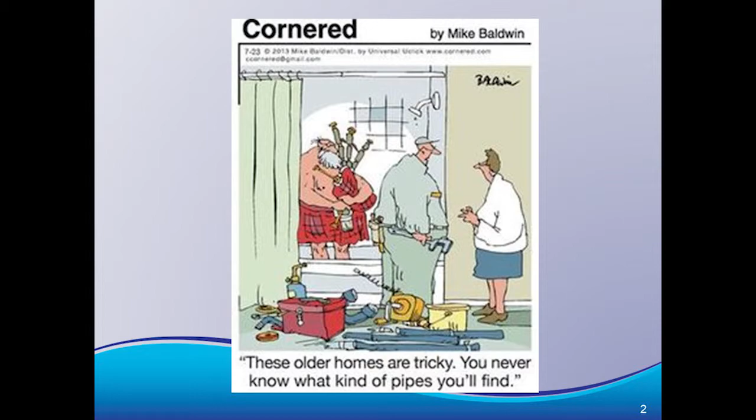And they say to start with a joke. So although this is not really well seen, I thought it was one of the few funny things I could find about plumbing, pipes, and infrastructure. So it says, these older homes are tricky. You never know what kind of pipes you'll find, which I think we all know to be so very true.

So originally this abstract was submitted by John with the City of SeaTac, and he was unable to continue with this, so they asked me to step in. His abstract was a little more technical and mechanical. Mine is going to include some of those elements, but I'm also going to talk about some of the challenges that are faced and things you want to think about before you implement your program. And with the combination of SeaTac and City of Federal Way, I'll try to give credit where credit's due for John's original slides. So first, why inspections and asset management?

I think everyone here knows that our underground systems are a mix of old and new. There are other factors impacting our programs. One of them is personnel turnover. I have people who have been in the program for 20 years and it's all in their head, literally. So we're trying to get this program on paper, actually electronically, into the system so that when he leaves, that little pipe nobody knows about is actually in the system.

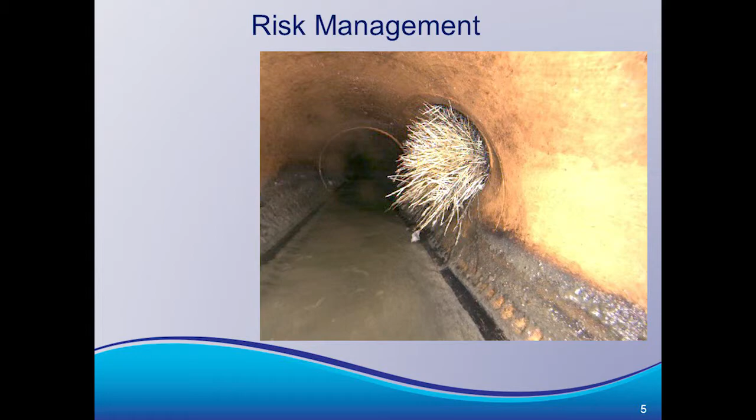Also the utility ratepayers expect a level of service. You're charging them money and they want their stormwater, wastewater, or whatever system you have to work. And then of course we have the regulatory requirements, which are always fun. And if you're like me, you really don't like surprises. If you're like City of Federal Way, you have a lot of tree canopy, and there are roots under every one of those beautiful old growth trees, and they're really in those pipes.

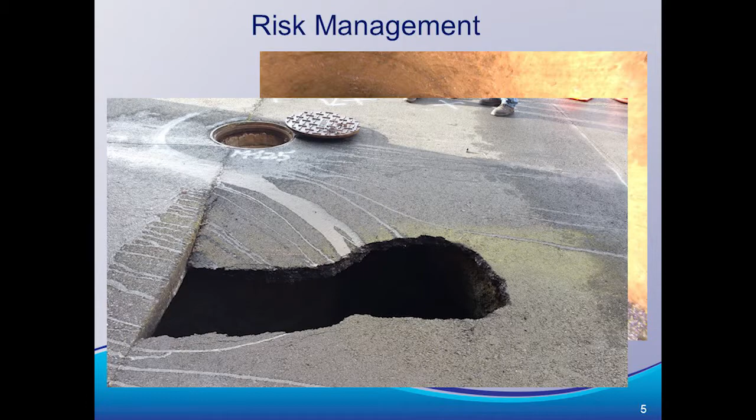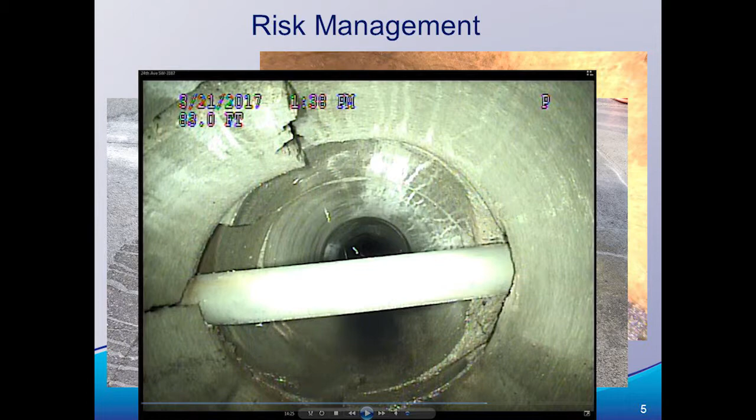So I'd like to get a show of hands: how many of you have actually implemented an infrastructure and asset management program? Okay, a little under half. So I think most of you are probably a little bit beyond sending your guy into the field, as seen in the first one.

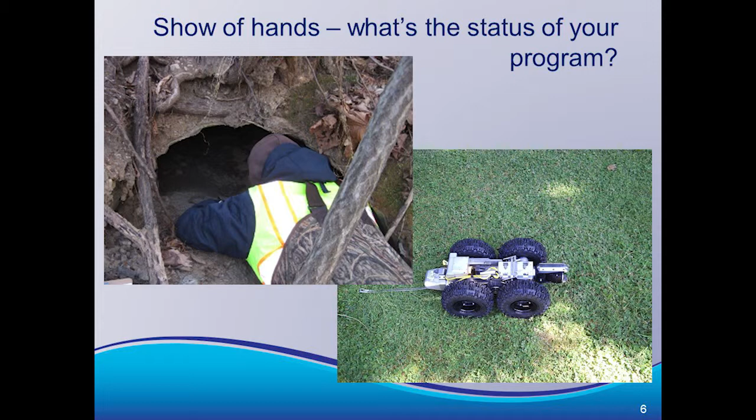So before you set up your system, I cannot emphasize how much you really want to answer these questions before you get into putting out $300,000 for a system, or even if you're just into the phase where you're buying your push cams and your pole cams. You really want to ask yourself these questions because, believe me, on the back end, it matters.

So some of the things you want to go out and ask yourself, are you looking to meet the minimum requirements? Are you looking to actually get pipe projects out of this? Are you looking to classify your inventory? What are your resources? Do you have the people for this? Takes more people than you think. And do you have the budget? Are you going to do it piecemeal? Can you get your push cams and your pole cams first and then get your track cams? Can you get your software off the shelf, or do you need IT to do it?

How are you going to train your people? You will constantly have people coming in and people going out. So what kind of system are you going to have for those people that come in and they're like, huh? So make sure and think about those kinds of things.

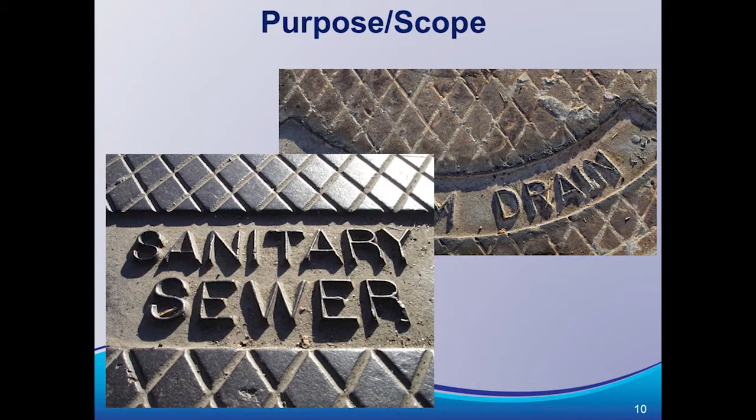Also, City of Tacoma, Kitsap County, I think Pierce County, not 100%, but they actually also have sanitary sewer. So they actually use the same software. They use the same camera, back-end IT and all of that. So are you going to have more than stormwater in your system?

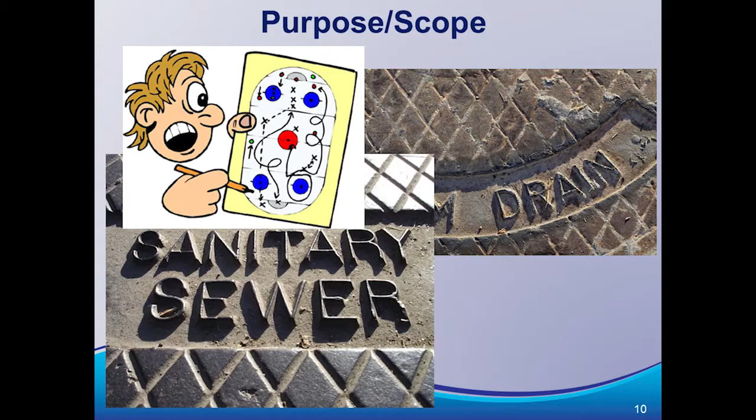Have you done your mapping? So are you going to use this for your mapping in advance of your assets? I think most everybody in this room probably has done their mapping. But if you're like us, I consider our mapping to be 80% because we continually go out and we're like, that pipe's supposed to be across the street. So those are the kind of things.

Are you going to use your condition assessment to fix your pipes? So you really need to think about this because your cameras need the resolution to see what the heck is wrong with that pipe to the point that the engineer can actually write a spec for doing the repair.

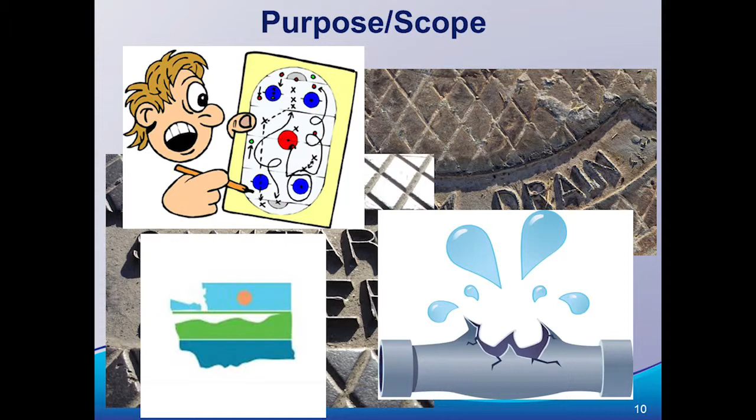Of course, I've a couple of times mentioned the regulatory requirements. So the field folks aren't as concerned about this, but when I'm trying to pay for things and I have to get them fixed within a certain period of time, I'm really thinking about that. And then, oh yeah, money. I'm really focused on money.

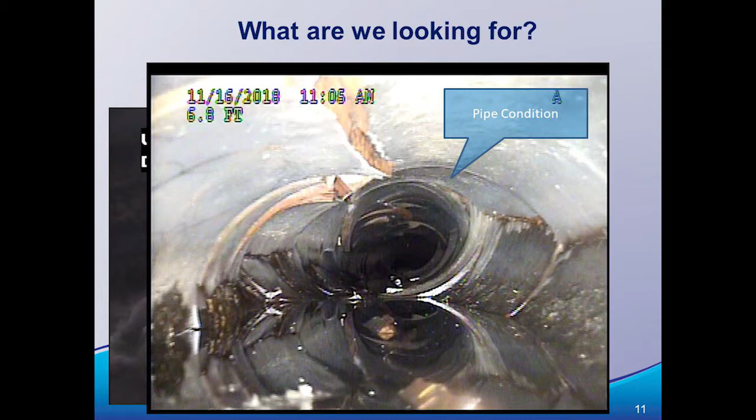So what are you looking for when you're going out there? You're not just looking for the system's condition, you're looking for other factors if you have a whole system. So think about, are you going to look for a functioning system, or are you going to look for infiltration and inflow? I reverse that, always do. Are you going to look to see if you have a functioning system? Condition, sometimes a little bit. And then this was supposed to be functioning system.

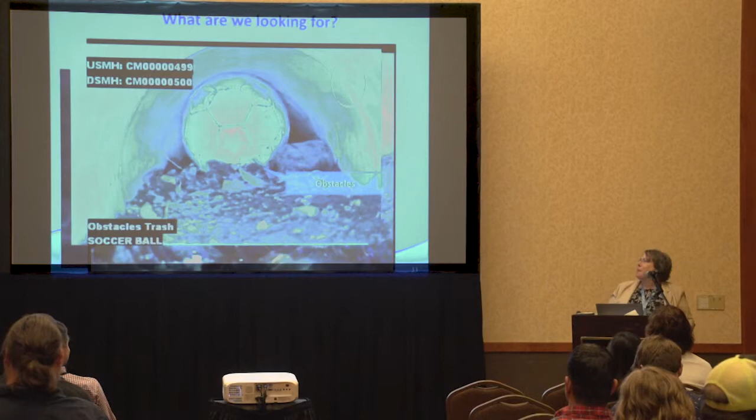So how many of you have like 10 basketballs and 7 soccer balls on your inventory every year when you're taking a look at your pipes? And how many of them actually do it on purpose? I swear they do. So what are you looking for and how are you going to store that data? These are the questions you really want to ask before you buy your equipment and your software and all of that.

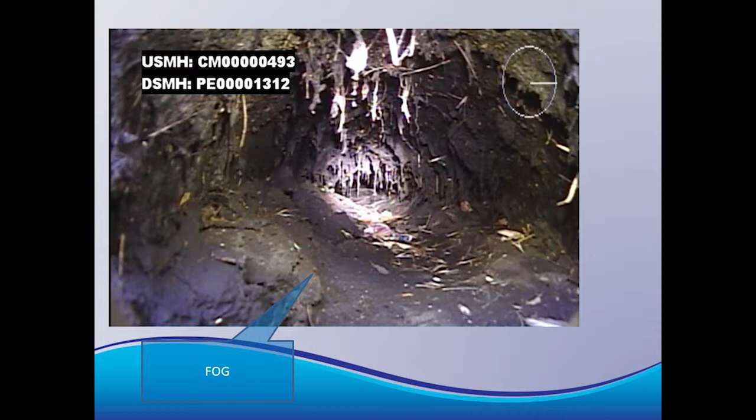If you're like us, you're going to try and incorporate your illicit discharge. This is actually outside of a restaurant, not in Federal Way. This is a SeaTac picture, although I have to say we've found this in Federal Way. Are you looking for fats, oils, grease? Are you looking for your illicit discharges? We're trying to incorporate our illicit discharge program into our maintenance management software, and of course our inspectors who go out with their cameras are doing this work for us to track it down.

So what are you going to use it for? Some of you may be in here and you may be going to your boss. Oh, I got to go pick it up. You may be going to your boss and saying, hey, how much is this going to cost? And you're going to tell them, well, if we do the whole tamale, it's going to be about $300,000. And that's your software, your equipment, and I highly, highly, highly recommend professional services.

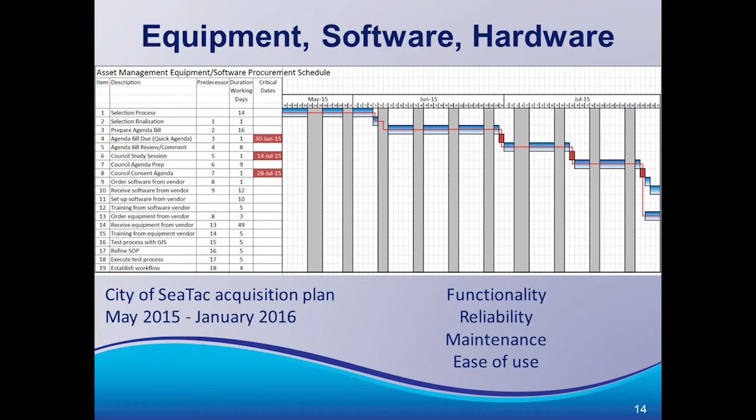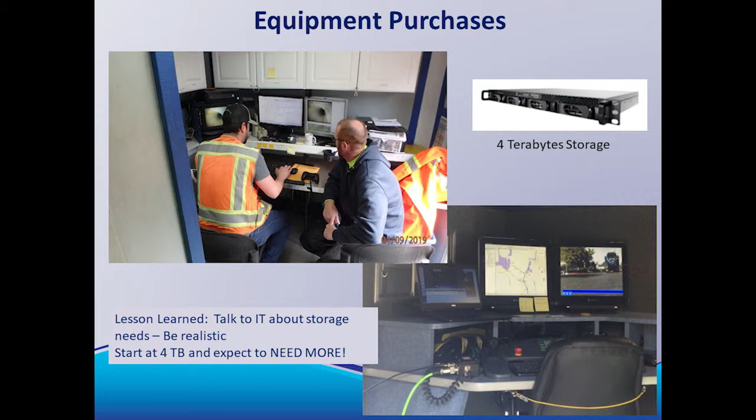This gives you a little bit of an example. But the other thing that you can't see at the bottom is budget for continued services. We spend $1,800 per year on maintenance costs of our cameras and our software and other equipment. So storage. Video cannot be compressed. So you're going to need a heck of a lot of storage. So think about those items.

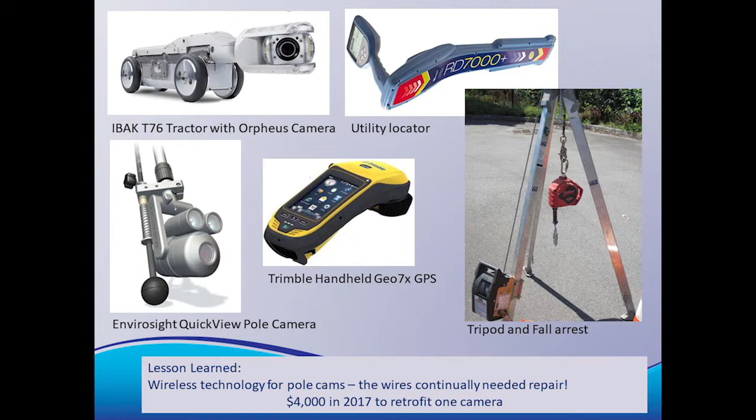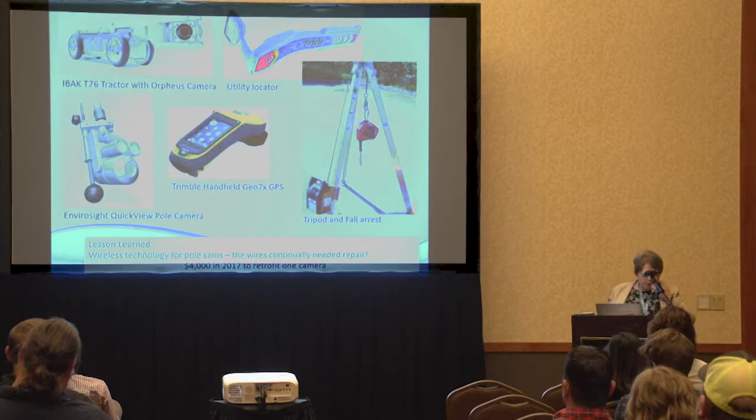This is just a little bit of inventory of some of the equipment that you're going to be buying. And one of the lessons learned for us is that it continually needs repair. And we updated to wireless on a lot of our technology because of that. Don't forget safety. Don't forget you need your traffic control, your tripods, your trailers. We have a trailer. We're going to change to a truck. When you're working on your system, think about where are you going to park it? Are you in a hilly area? Do you have a lot of flat area?

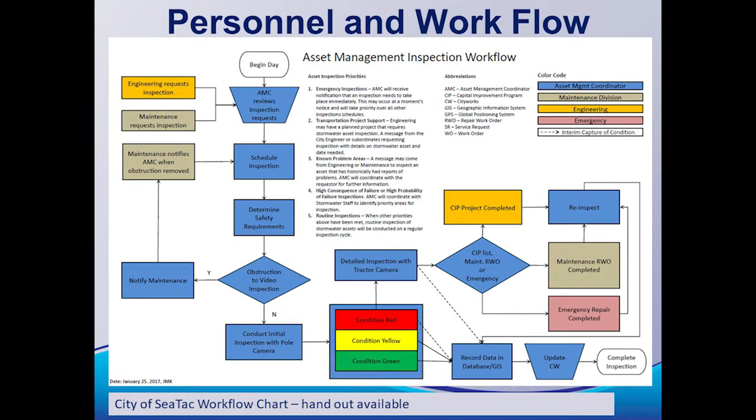Are you in Puyallup, so you don't have these kind of challenges where it's fairly flat? The next slide, I actually have a handout because this is kind of hard to see, but it's a workflow process. So how are you going to do this? How is the information going to be triggered, the need? How are you going to get it all the way to the end?

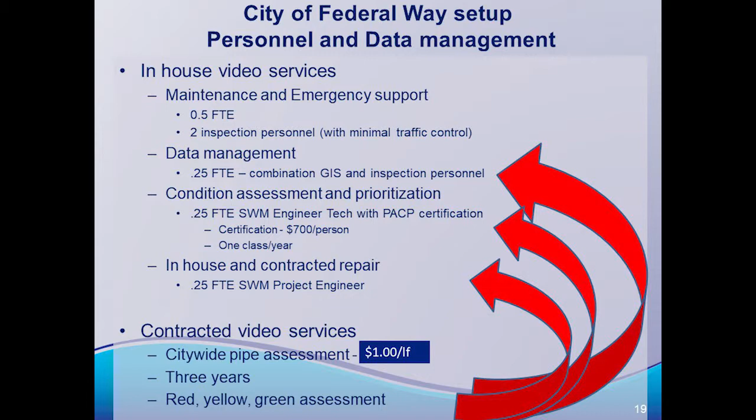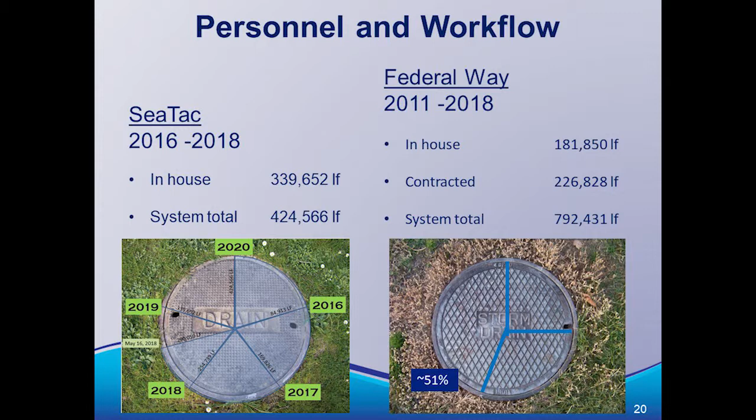For us, this is a quick look at how many personnel we need for our system, and this is including contracted services. So we are contracting a lot of our services out right now at 74 cents per linear foot. But if I go to $1 per linear foot, I've only got the back end for the assessment. I still have all this other for the maintenance and the emergency response. So that's another thing to think about too. If you contract it out, there's a lot to think about on that one.

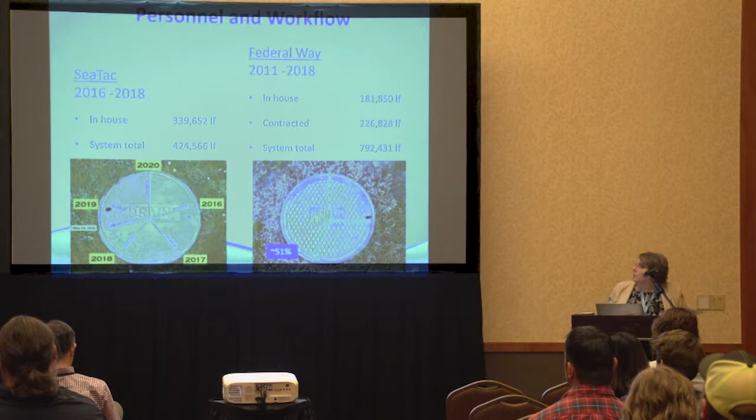SeaTac, they're supposed to be through their system by 2020. We do have a bigger system, but we have a different model, so ours is 51%. This is what the City of Federal Way looks like. We have Cues Granite, and this is the information that you collect. The lesson learned on that is work with IT, work with IT, work with IT.

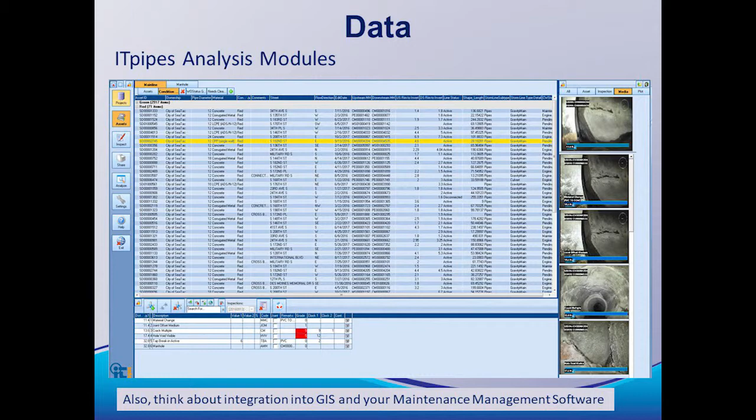This is City of SeaTac. As you can see, theirs is a little more robust. They went with ITpipes and Cityworks. So when you're looking at the software out there, make them work for it. Go talk to other jurisdictions. And when you're sending out your RFQ, your RFI, RFP, make them work for it. Make them show you what they're going to do for you.

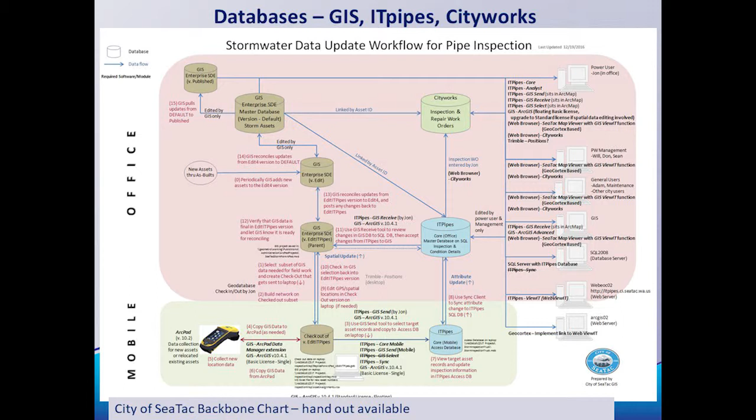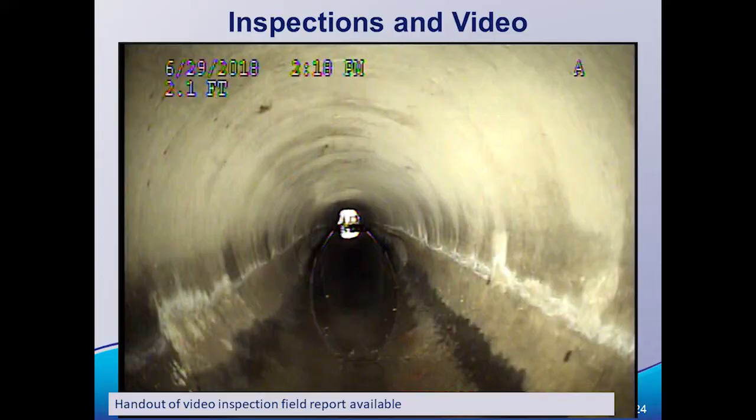This also has a handout on the table. This is the backbone from the IT folks. This is what kind of back end you're going to need on a full system of software. I was going to play this real quick, but I was running out of time. So we're still in some of our paper action, as you can see from there. So this is just a long list of considerations.

I want to speak real quick to risk management. Stick with the plan. If you have a pipe that breaks and you don't know about it, your liability is not so bad. But if you have a pipe that breaks that was supposed to be inspected 2 years ago under your plan, you've got some liability. So make sure your plan is realistic and make sure to stick with it, because you have some liability if you don't. The other thing is you end up getting behind instead of ahead.

This needs people. You got traffic control. You got the camera. So you got one person in the trailer. You got one person actually making sure that you got the right tires on your camera so it doesn't get stuck. So some of that, and succession training, succession planning. Like I said, everything's in my maintenance supervisor's head. I got to get that information out of his head before he retires.